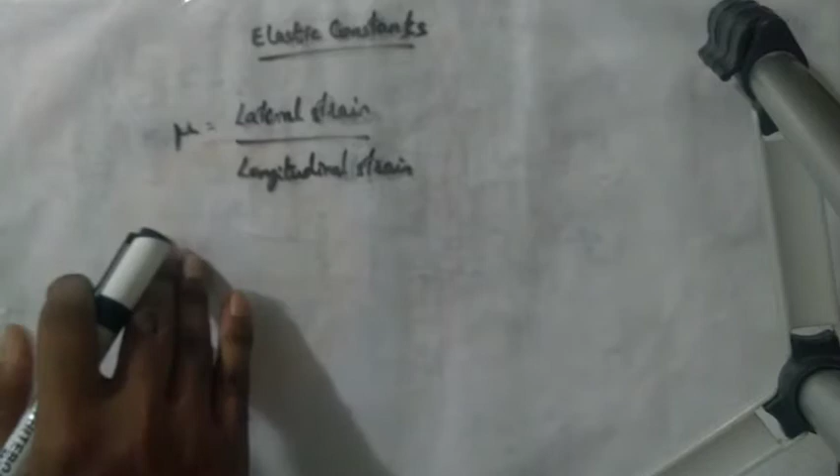We are studying forces, how forces act on a material within the elastic limit only. That's why we got the name elastic constants. The constants are particularly used to study how forces act on materials, how the strains are formed within the elastic limit only. Hence the name elastic constants.

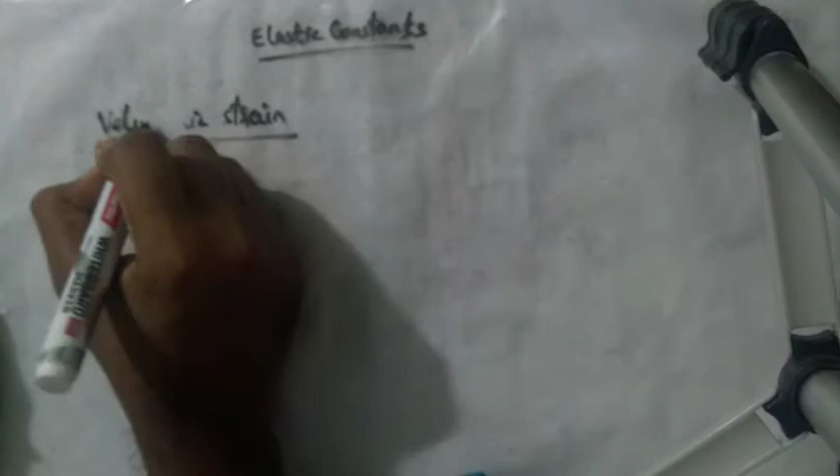Today we are going to have a session on volumetric strain. This volumetric strain is denoted by EV. Volumetric strain is nothing but - let us have a material in rectangular shape, cuboidal. It is acting upon forces in all the directions, not just one but all.

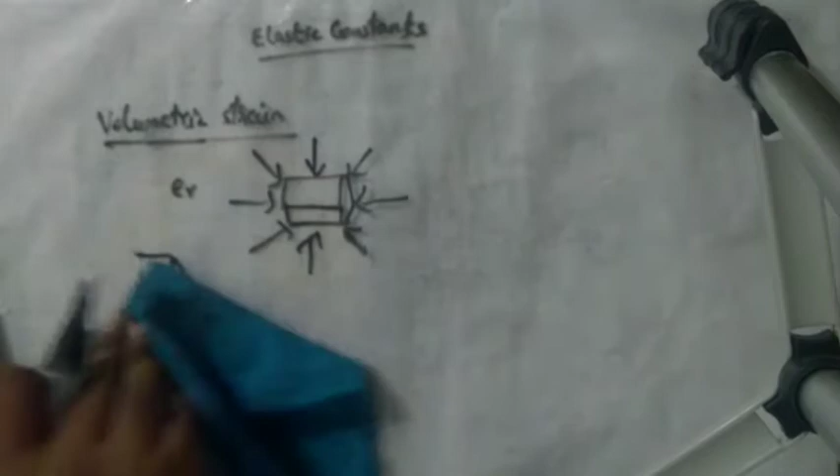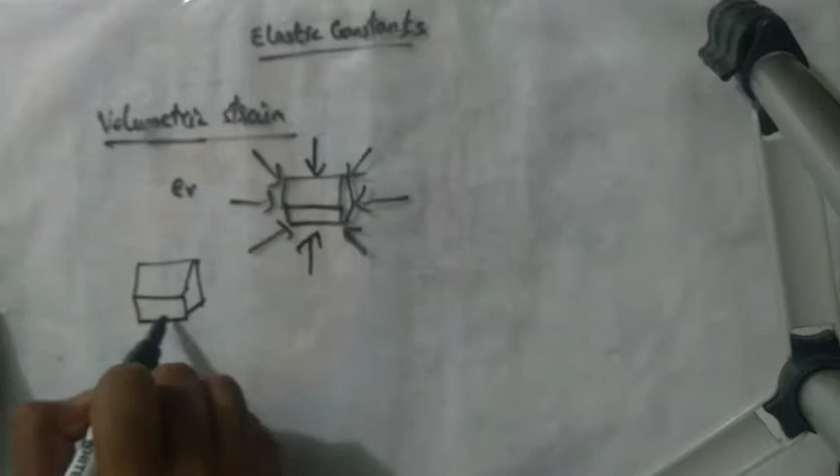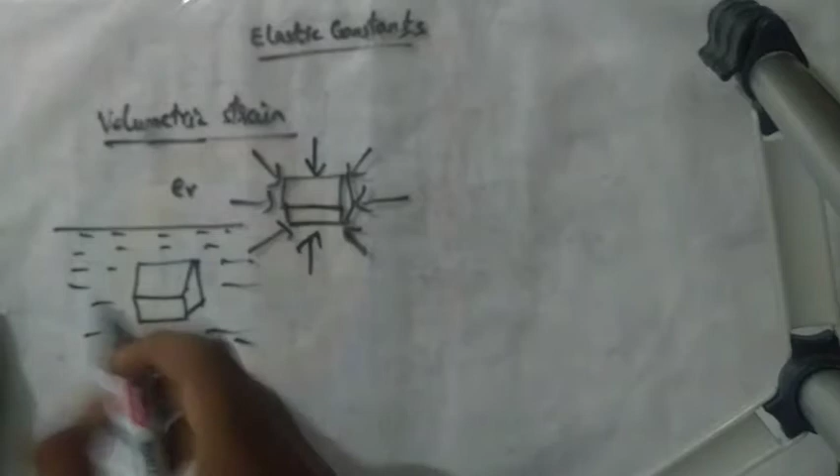If you can't imagine this, just imagine that the material is immersed inside water. Let it be the Indian Ocean. Let's say this is the surface of water, this is the Indian Ocean - we are Indians, so let it be the Indian Ocean. Someone dropped it when a boat was going by, let's say they dropped a container or some material.

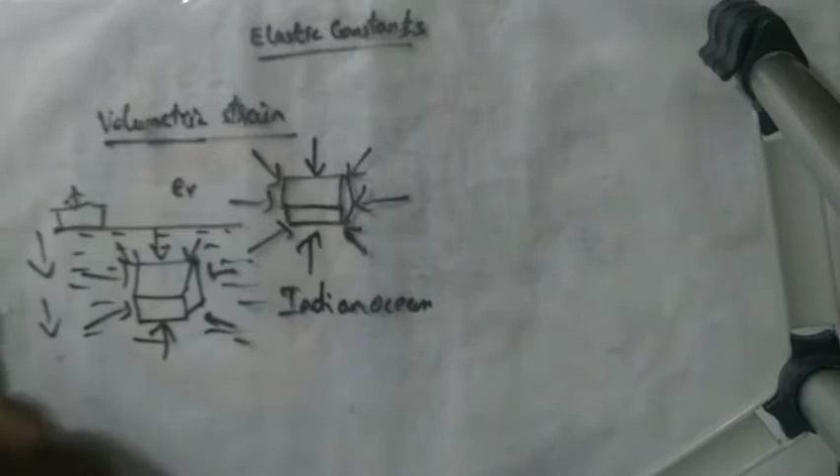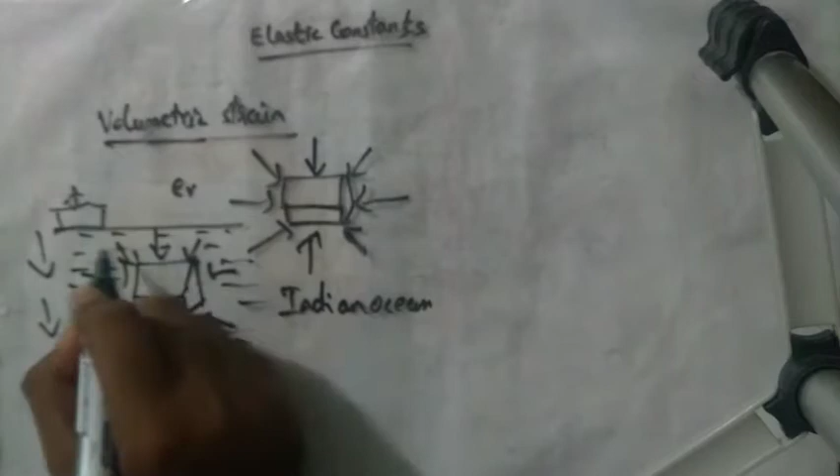Then what happens? The forces act on this in all directions, because whenever we go down the ocean, we'll have more and more pressure. Note this point, this is very important - we'll be studying this topic as hydrostatic stress in fluid mechanics. This hydrostatic stress is similar to volumetric strain, that's why I'm using this example. When you're immersed in water, you'll have forces in all directions. Similarly, in volumetric strain, we'll have forces in all directions.

What is strain? Strain is change in dimension to original dimension. Here, it is change in volume to original volume.

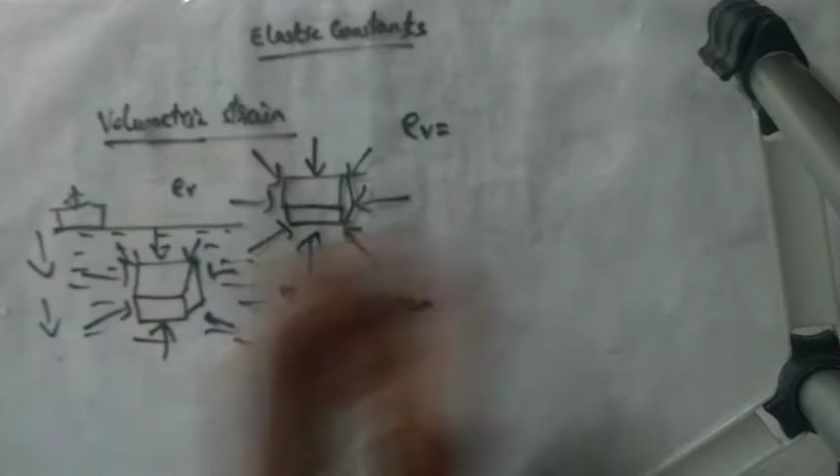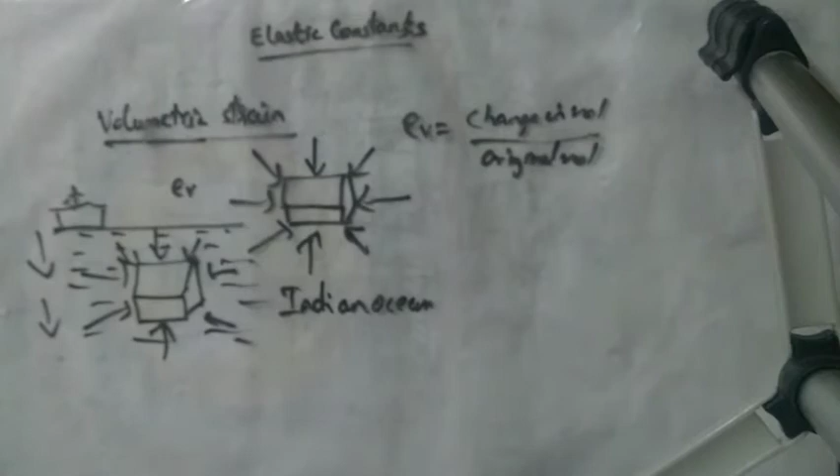When forces act upon this material, the material changes its size, changes its volume. If this material is this big, it will be changing its length to this much. Let me make a neat diagram so you guys can understand. This will be converted into a small box - forces act upon it on all sides. If all forces compress on all the sides, it turns into a tiny new box, a tiny small cute box.

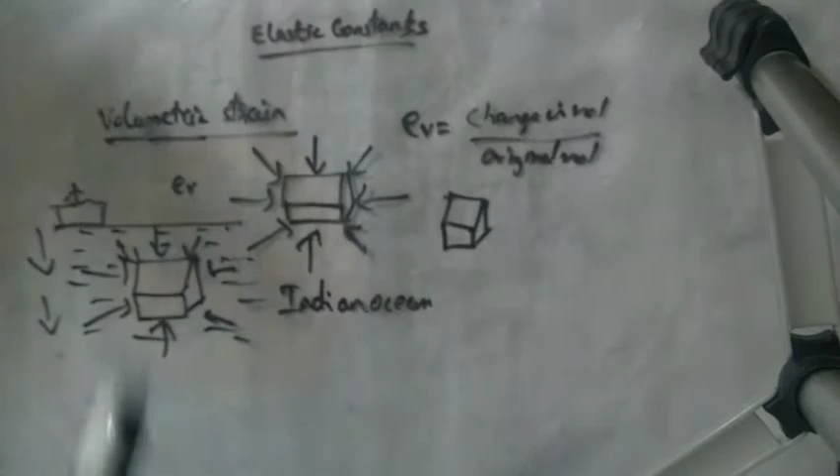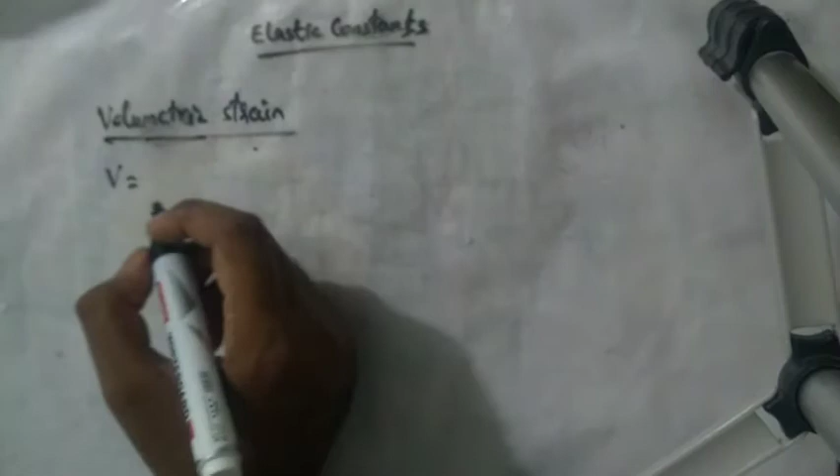This volumetric strain is denoted by EV, change in volume by original volume, delta V by V. We know volume, so taking a rectangular cuboidal box, V equals length into breadth into thickness, or depth - let it be d for depth.

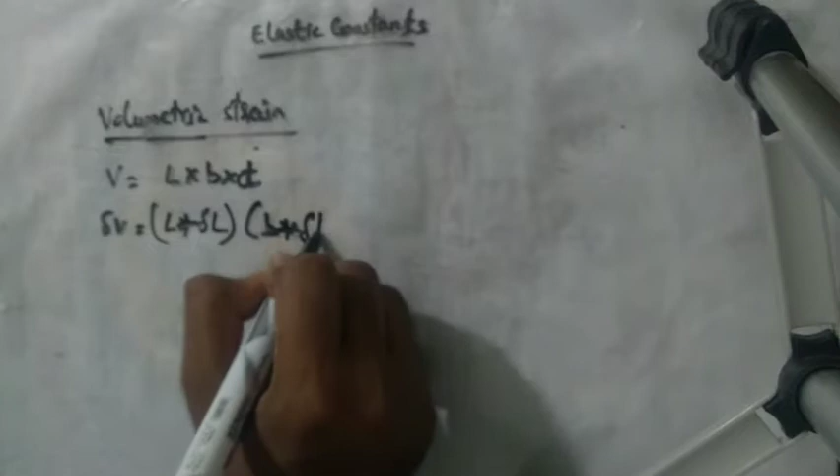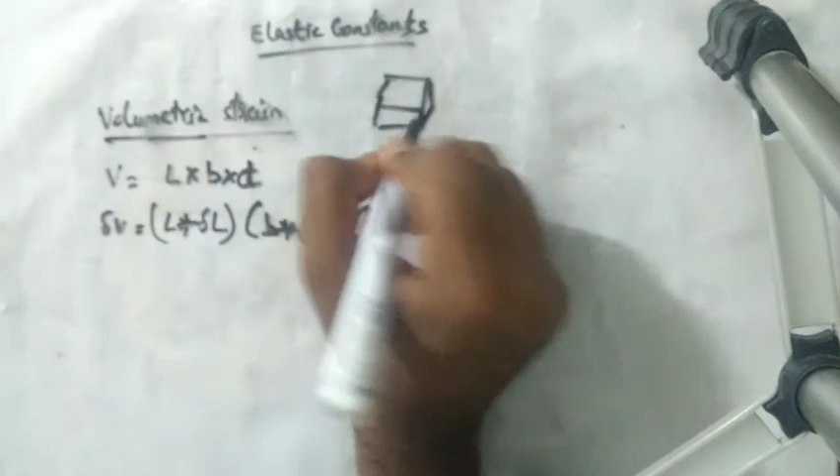This delta V can be given as length plus change in length, into breadth plus change in breadth, into depth plus change in depth. This big box is being converted into a small tiny box when forces act in all directions.

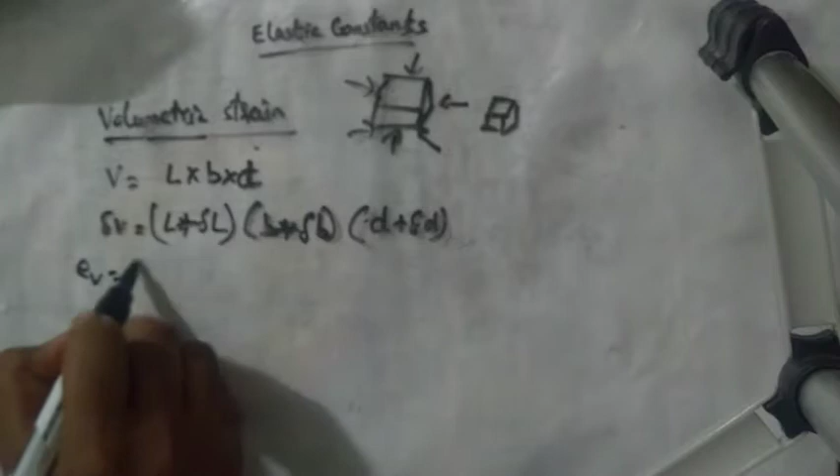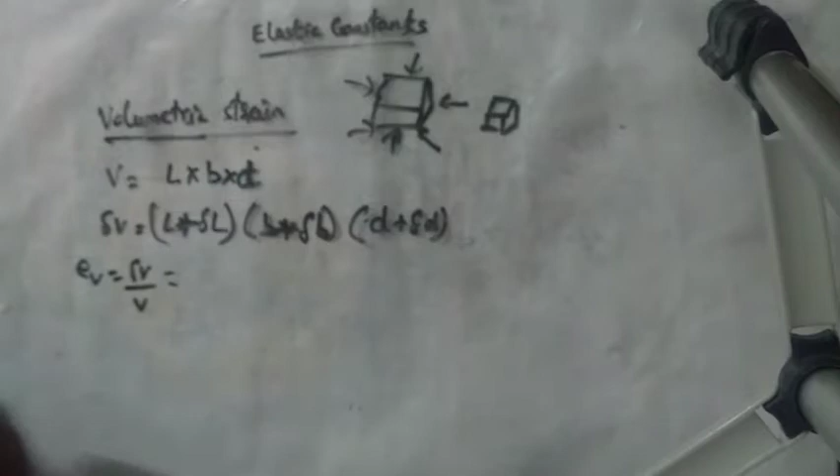What happens? We need EV equals delta V upon V. If we equate this equation, our length is bigger and the other dimensions, breadth and depth, are very small compared to this length. So we will equate and take only the bigger components, omitting wherever constants other than length are coming, keeping length alone.

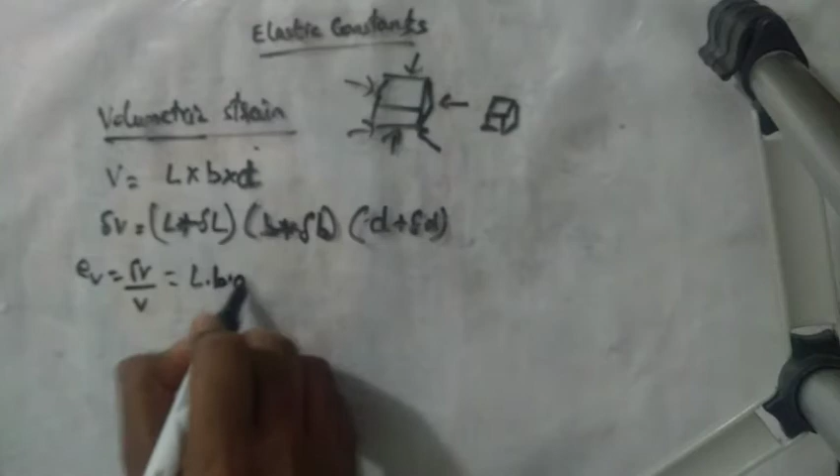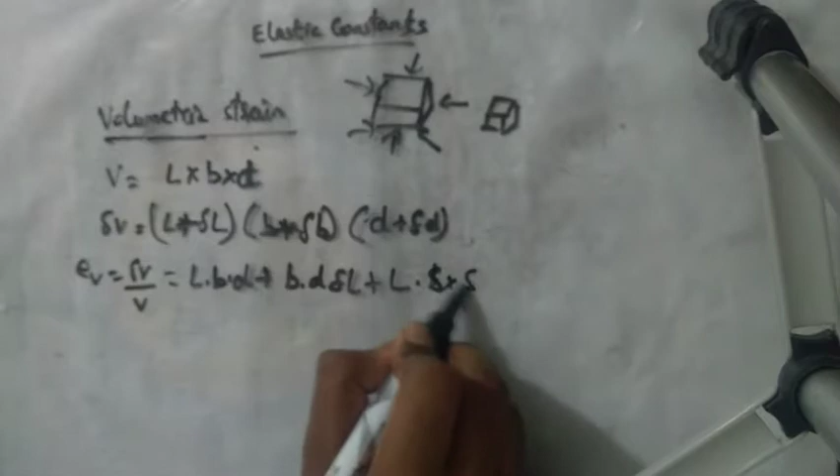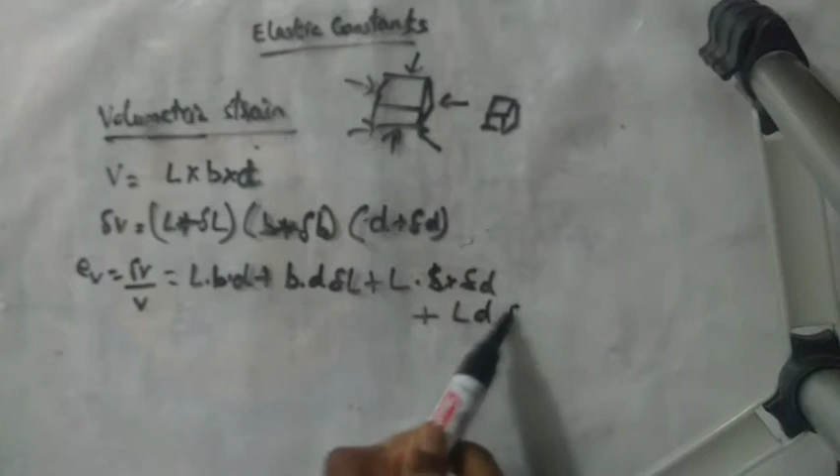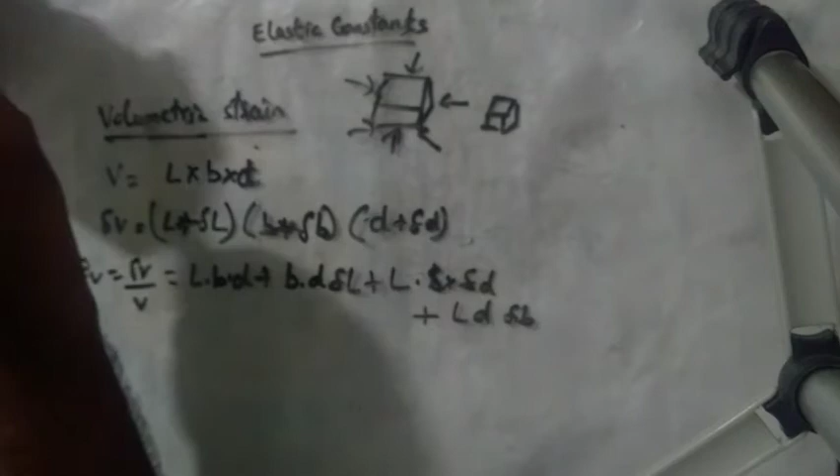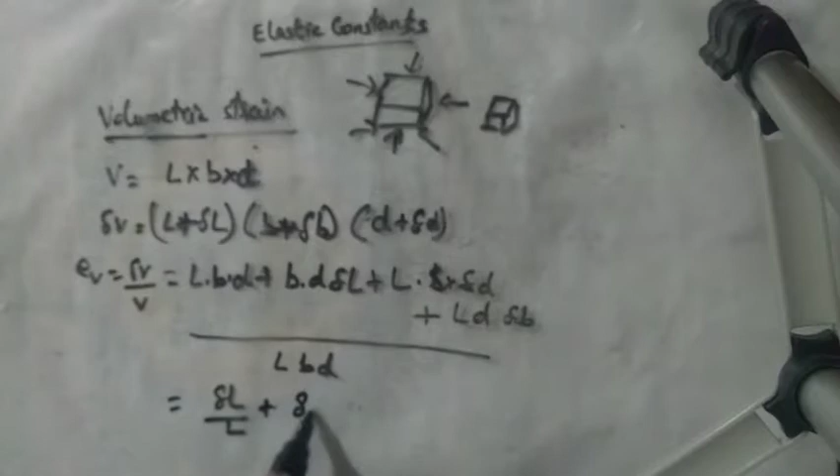Neglecting those small terms, we divide this by length into breadth into depth. If we divide all terms by this, we get change in length upon length, plus change in depth upon depth, plus change in breadth upon breadth. This becomes the equation.

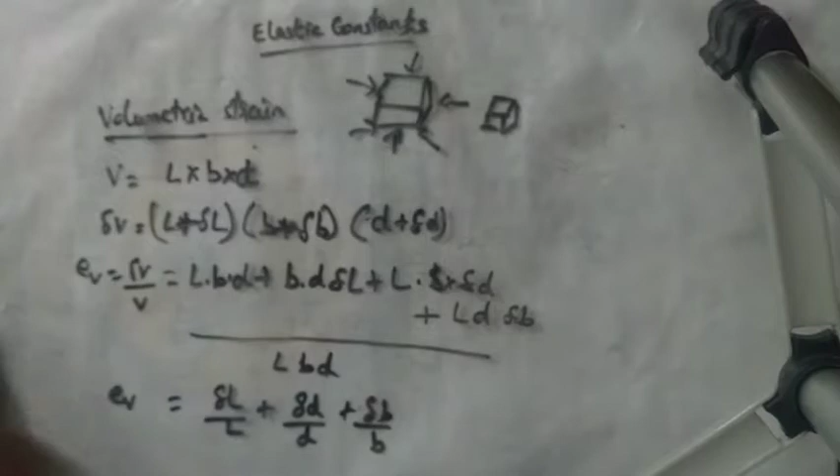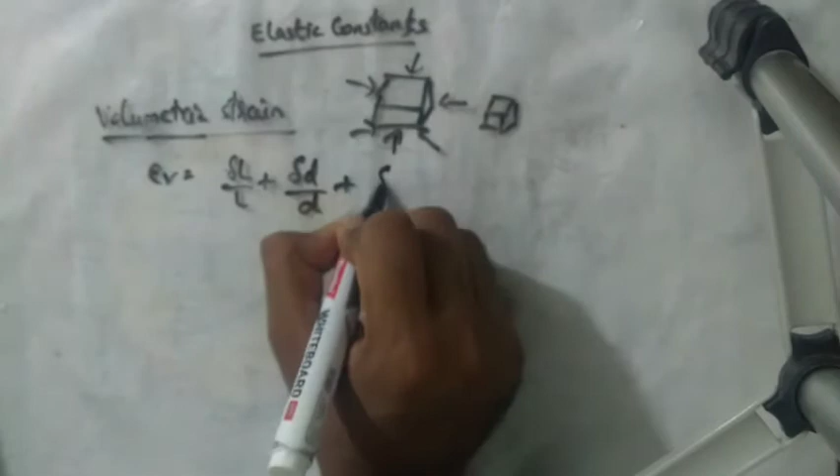We can see that volumetric strain equals one longitudinal strain plus two lateral strains. So we can write EV equals delta L upon L plus delta depth upon depth plus delta breadth upon breadth, which is longitudinal strain plus 2 into lateral strain.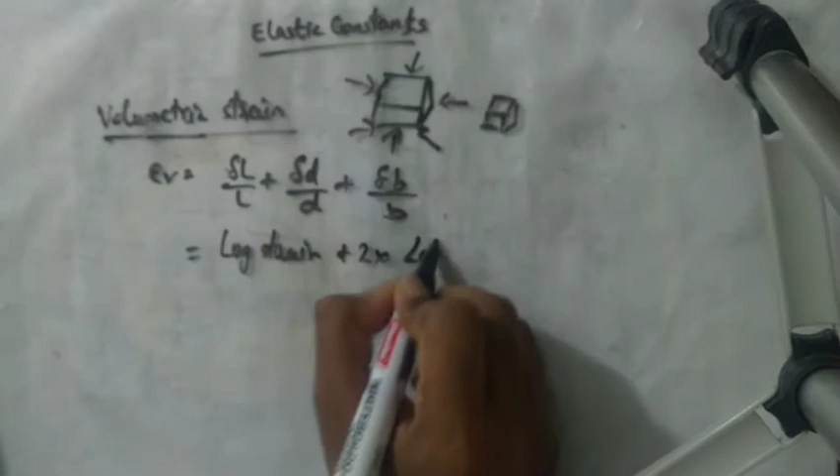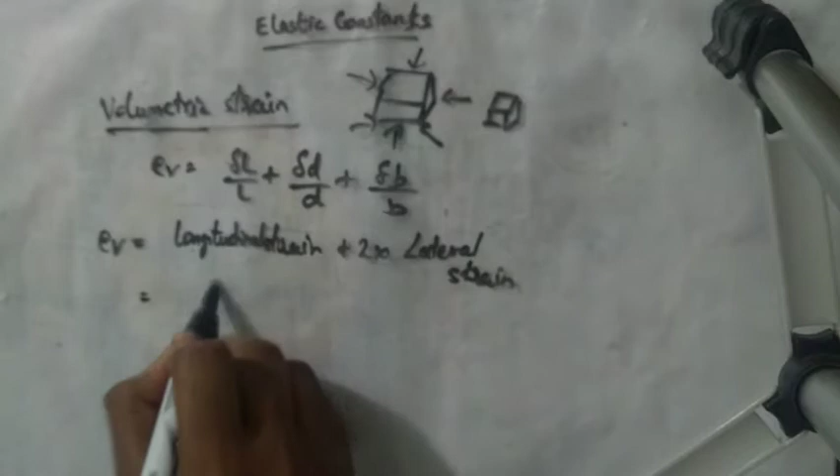Okay, longitudinal strain resolves into 2 lateral strains. Longitudinal strain can be written as delta L upon L, and this lateral strain can be written as minus mu into longitudinal strain, as we derived yesterday.

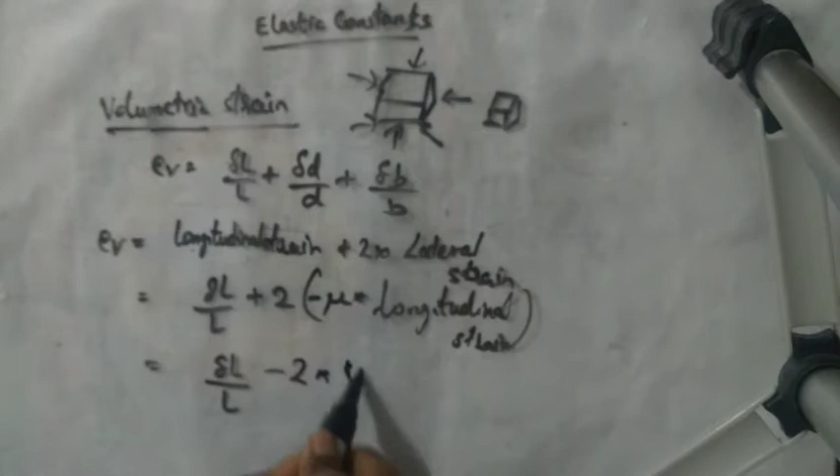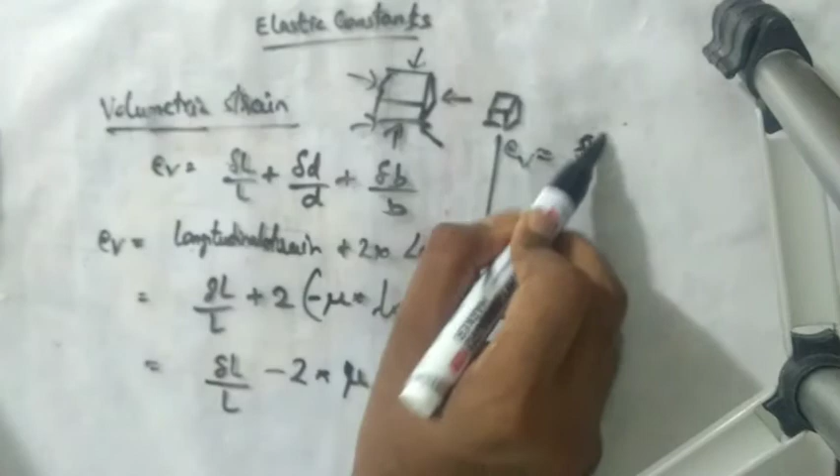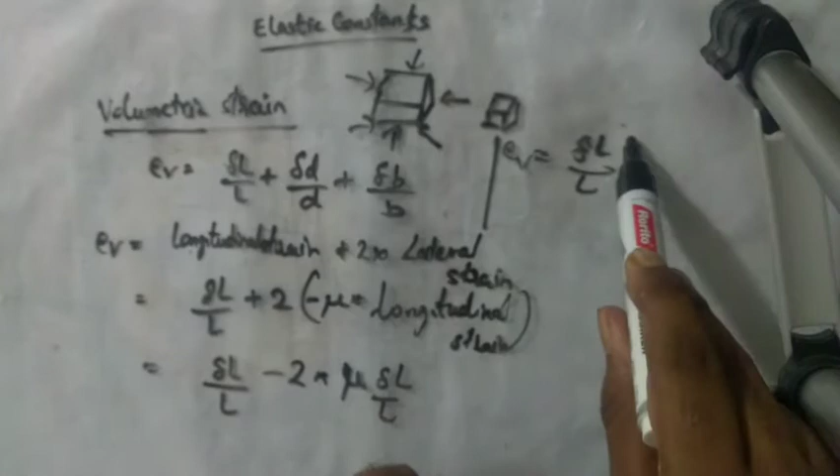So what does the relation become? Delta L upon L plus minus 2 into mu into delta L upon L. So this equation becomes: EV is equal to delta L upon L into 1 minus 2 mu. This will be the equation.

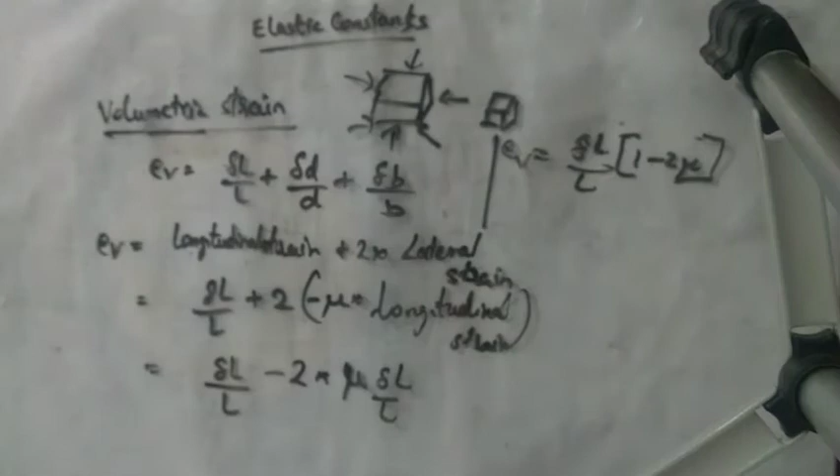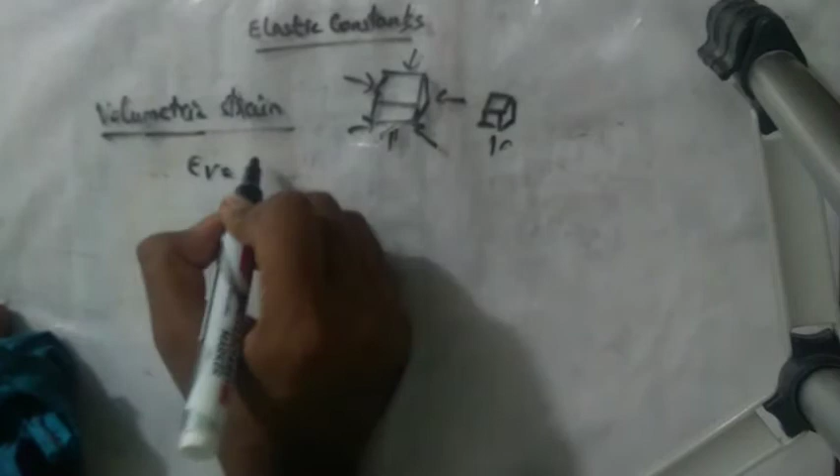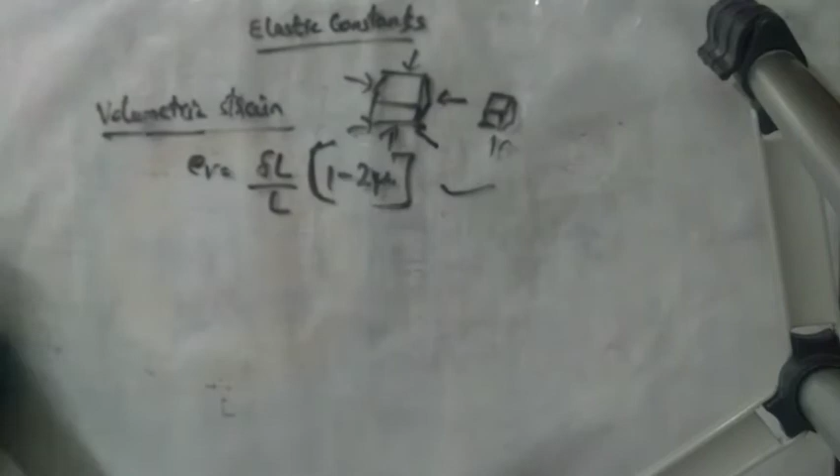So the equation becomes delta L upon L into 1 minus 2 mu. This is the equation of volumetric strain, and we'll be using this in problem solving for GATE. This is a very important formula. Let's see a problem on this formula.

There is a steel bar. The bar is of rectangular cross section. You might notice a rod is of cylindrical cross section.

This change in length is given for a steel bar. Its length is given as 300 mm, its breadth is given as 50 mm, its thickness or depth is given as 40 mm. It is acting upon a pulling force, that is tensile force, of 300 kilonewton.

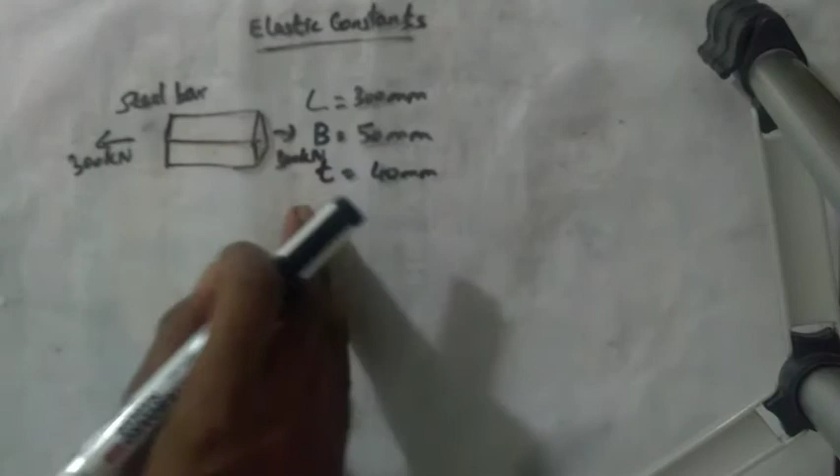In volumetric strain, not only do forces act on all sides, but also due to a single force there will be change in volume.

In some conditions, they will be given as: due to a single force there will be change in volume. In most exams like SSC JE, we will be having forces acting on all sides, which they consider as volumetric strain. If two strains act in tension, they consider it as only longitudinal strain and lateral strain. So don't confuse that. If a single force acts on a material, volumetric strain still happens.

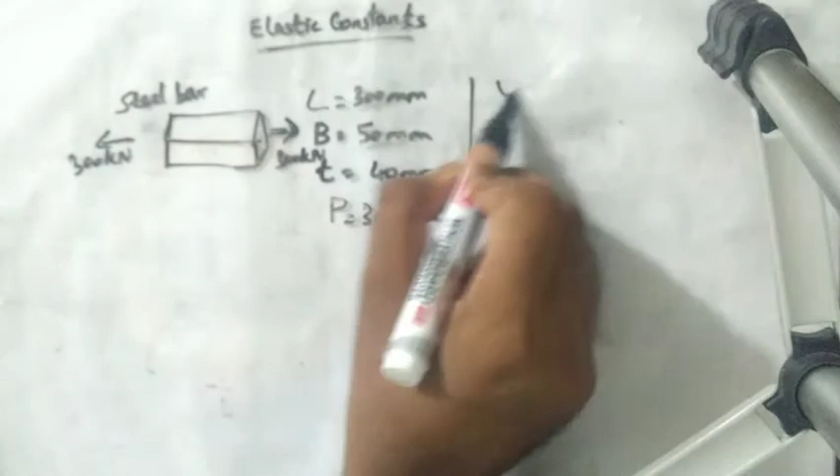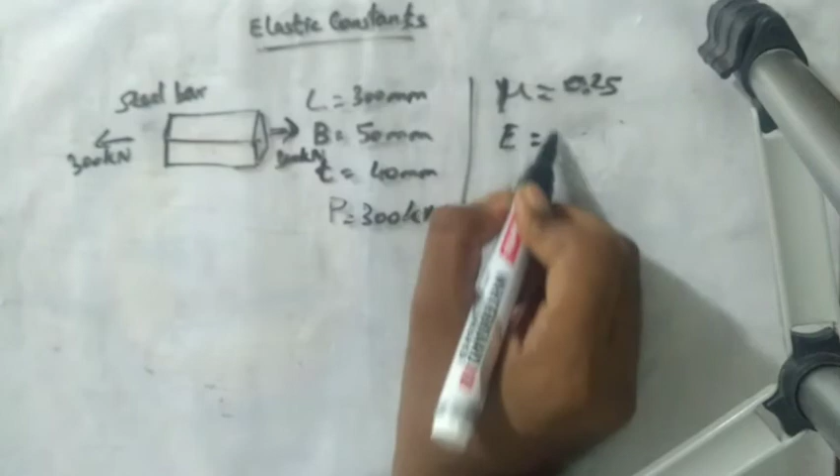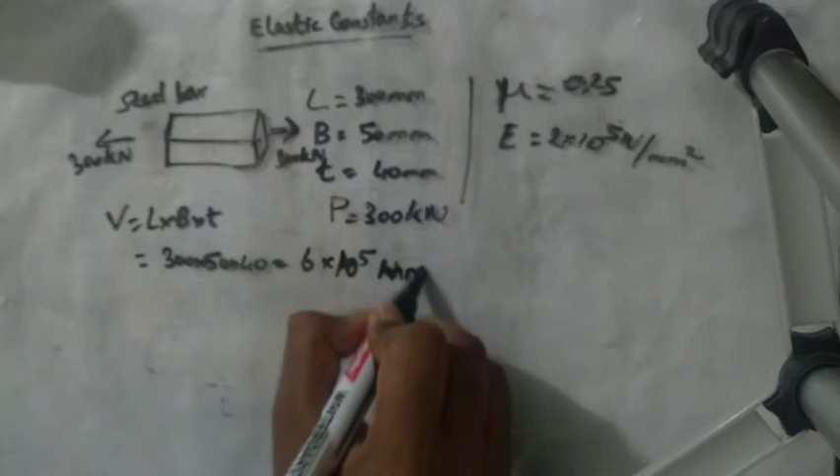P is equal to 300 kilonewton. Mu, that is Poisson's ratio, is given as 0.25, and Young's modulus is equal to 2 into 10 to the power 5 Newton per mm square. We know volume is equal to length into breadth into depth, equating that to 300 into 50 into 40, we get 6 into 10 to the power 5 mm cube.

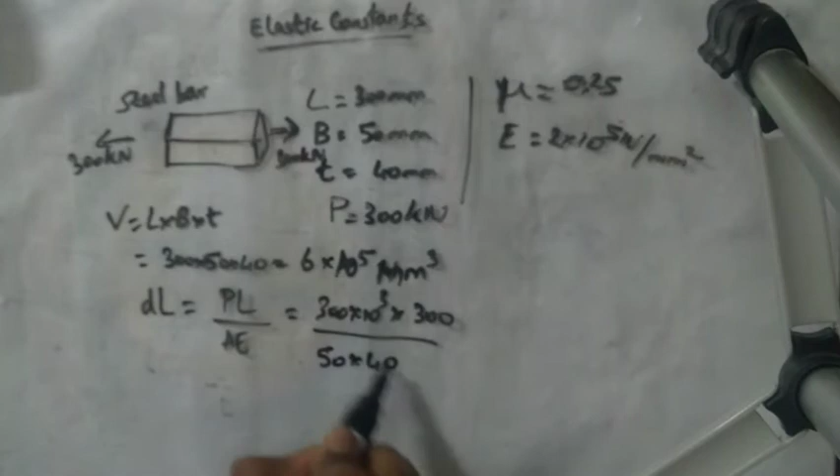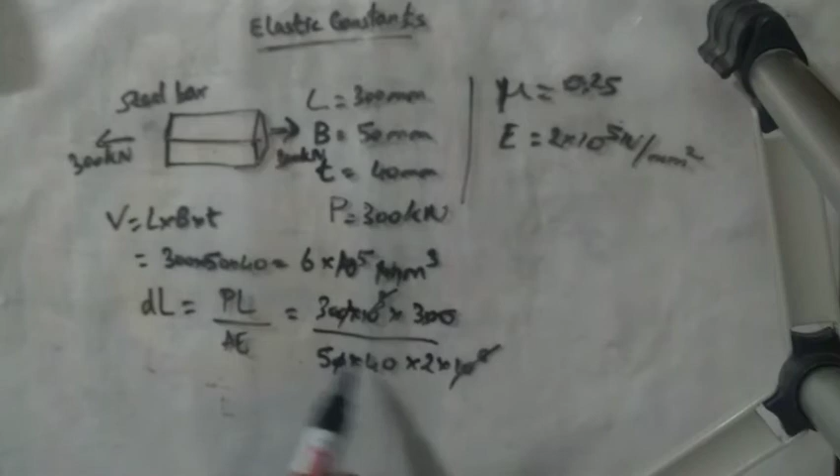We know change in length delta L is equal to PL upon AE. Force is equal to 300 into 10 to the power 3 into 300 divided by A into E. A is 50 into 40, E is 2 into 10 to the power 5. 10 to the power 3 and these zeros, 10 to the power 5 cancel. One zero cancels here. Solving this we get delta L as 0.225 mm. But we need delta L upon L.

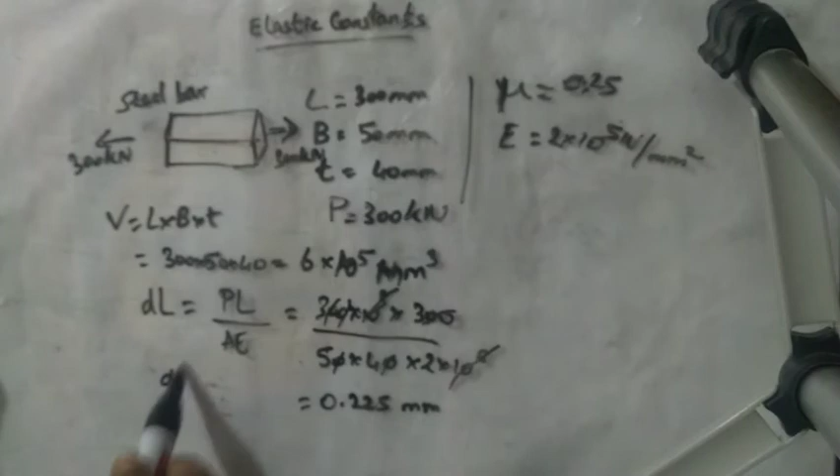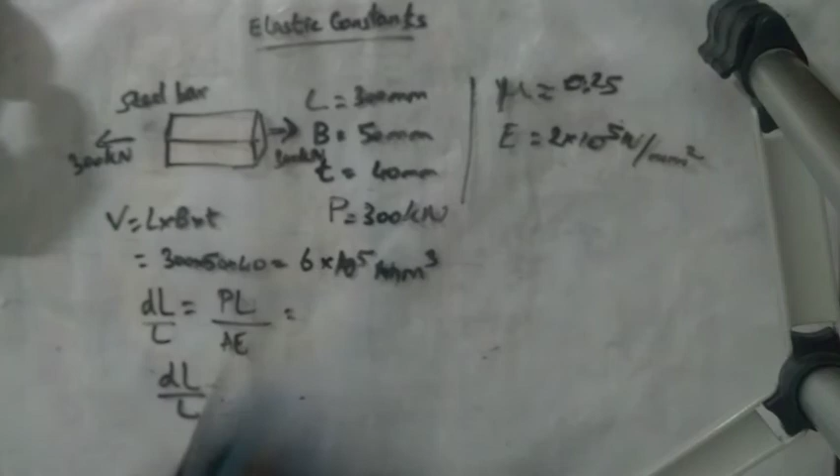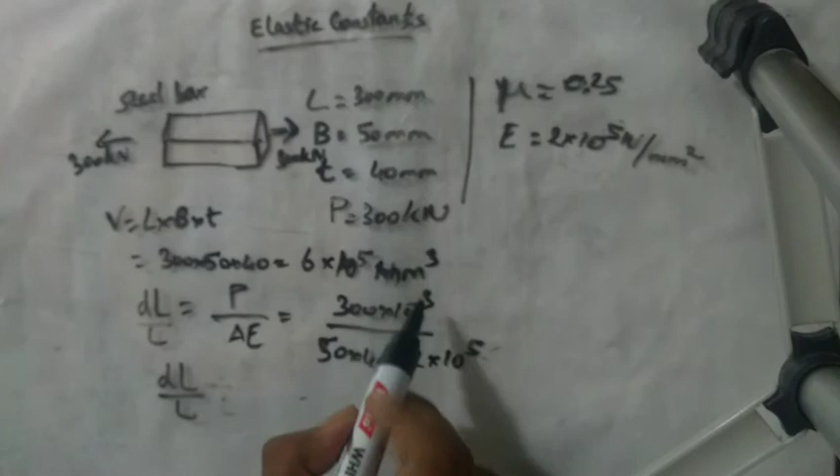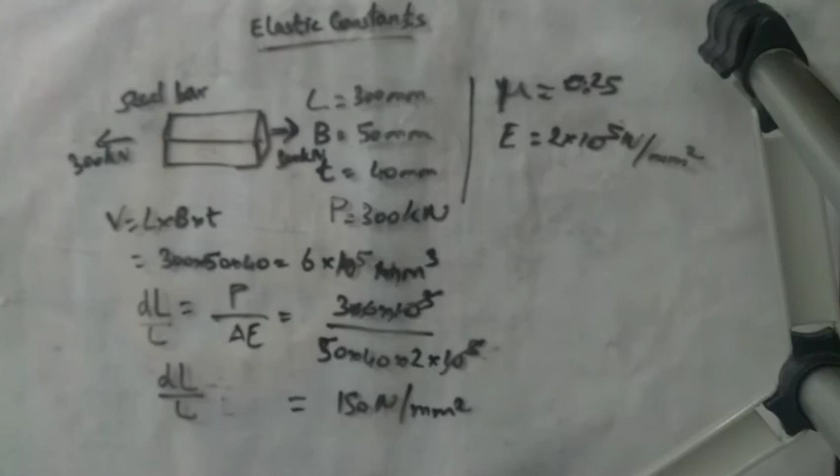So we will not keep this as delta L. We will take L to the bottom, so the L here goes away. P upon AE, A we know, P is 300 into 10 to the power 3 divided by A, which is 50 into 40, upon 2 into 10 to the power 5. Two zeros get cancelled, and solving this we get 150 Newton per mm square. Okay, we got delta L upon L.

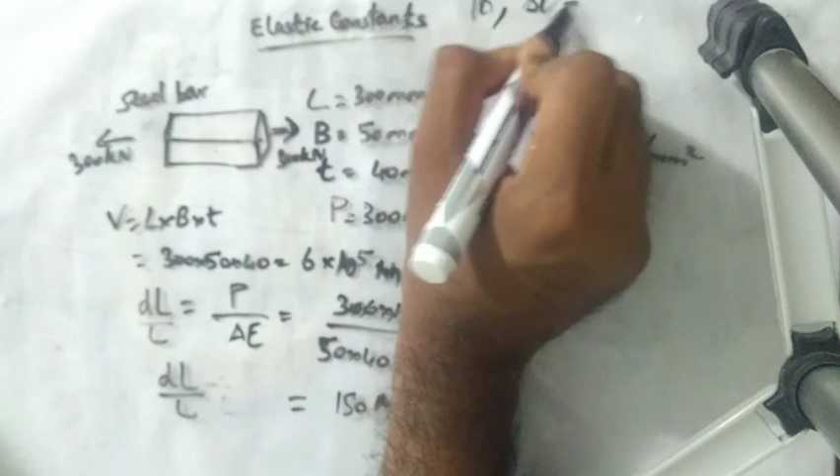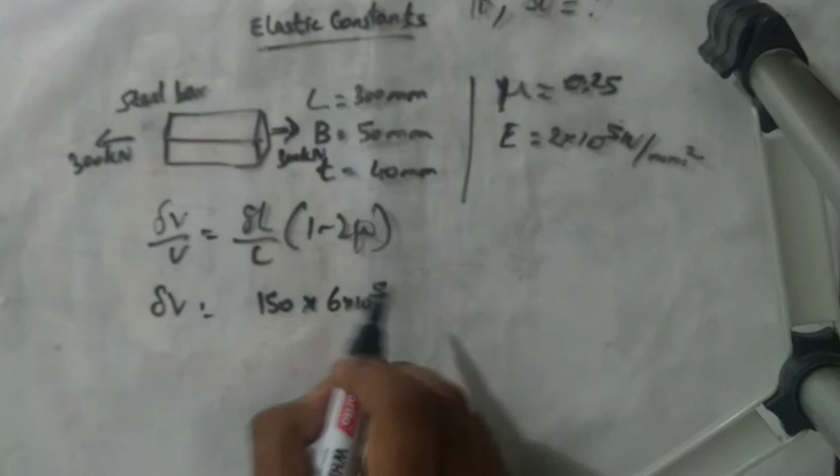Now we have to find the change in volume, delta V. We know the formula: delta V upon V is equal to delta L upon L into 1 minus 2 mu. We want delta V, so delta V is equal to delta L upon L, which we got as 150, into V which we got as 6 into 10 to the power 5, into 1 minus 2 into 0.25.

On solving this we get delta V, that is 225 mm cube. This is the change in volume, and this is the answer for that.

This change in volume question, they will ask the change in volume, and given this data, this will likely be asked as a 2-mark question in GATE. They'll also ask it in ISRO exams.